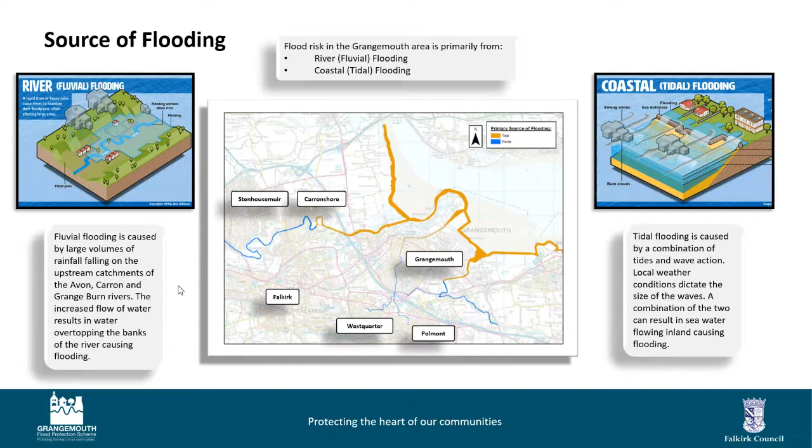Sometimes the feedback we get from communities is a question around why do we need to have any scheme at all. There's maybe a lack of understanding of what the flood risk is at the moment.

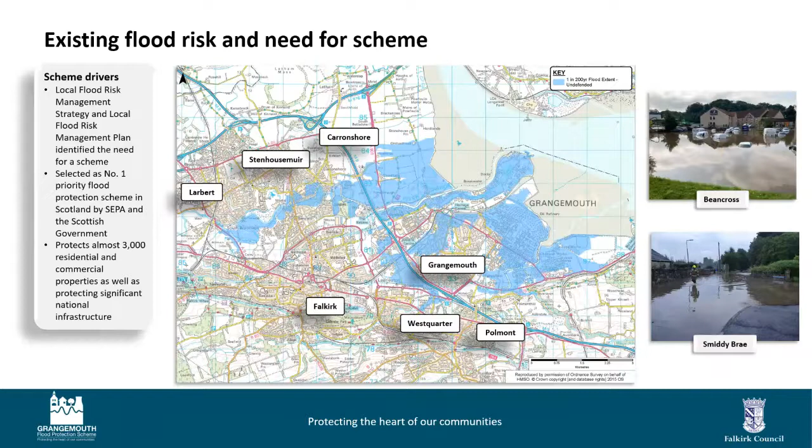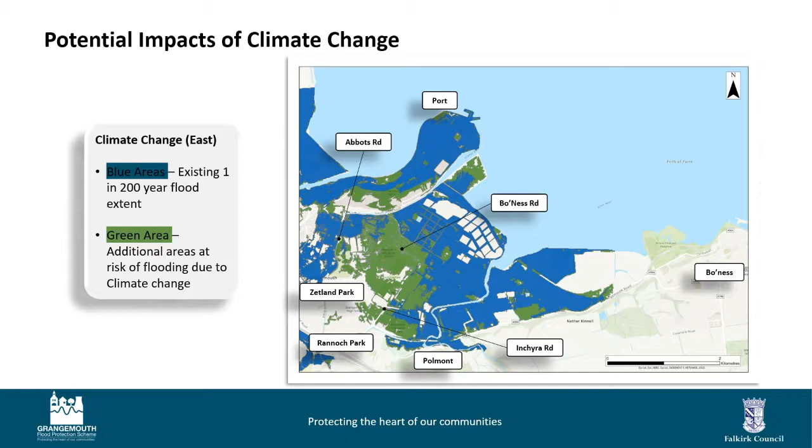In terms of numbers, the number of residential properties at risk at the moment is around 2,500, but with predicted climate change, this rises to around 5,500. A significant change, and this is why we're looking at the proposed scheme and what we can do to provide resilience for the communities.

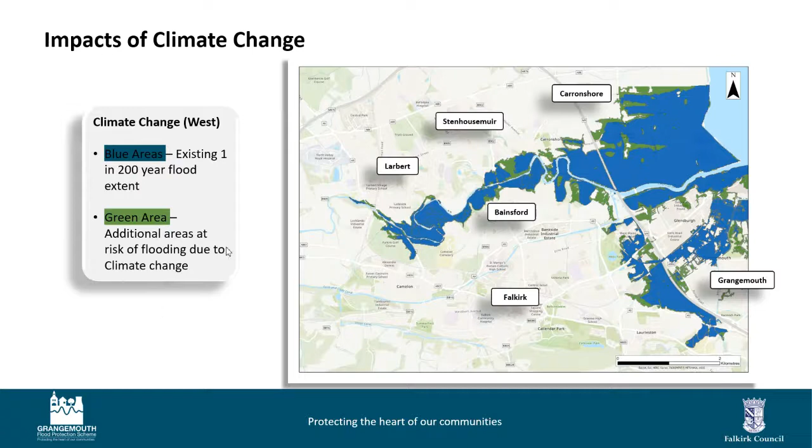As I stated previously, this engagement process, which began a couple of years ago, will continue throughout the design development phase, leading up to formal notification next year. So these next 6 to 9 months are really key to ensure that as many local people as possible are made aware of the project and the proposals, and have an opportunity to provide comment.

Although we are restricted at the moment due to COVID from having face-to-face meetings, future consultation events throughout the rest of this year and into next year will be a range of digital events like this and face-to-face events where we can come into the community and speak to individual people. Today's session is more of an overview of the entire scheme, but we're starting to get into smaller groups focused on individual communities.

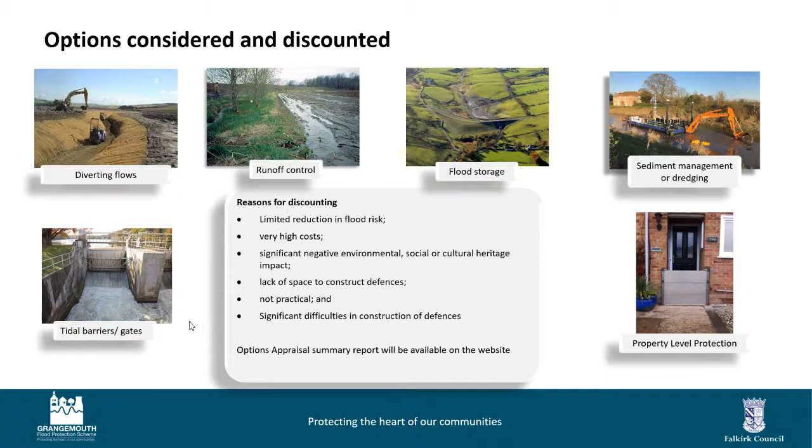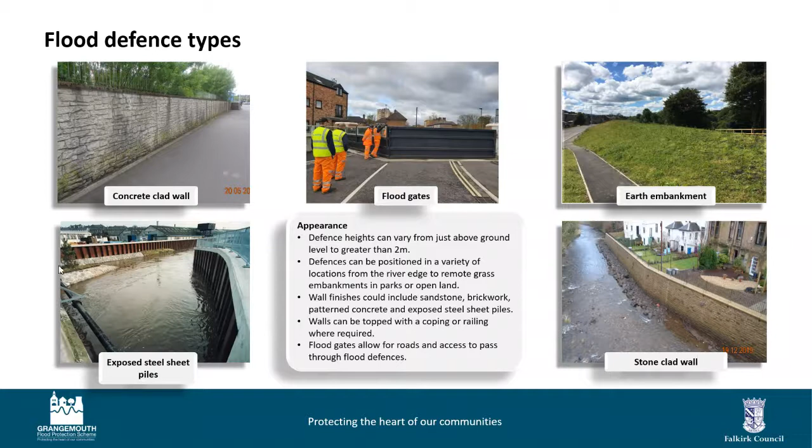So in the next couple of slides we'll talk through the alignment of the Grangemouth flood protection scheme, of the flood defences. We've colour coded where there's a proposed flood wall and where there's a proposed flood embankment, and identified floodgate structures.

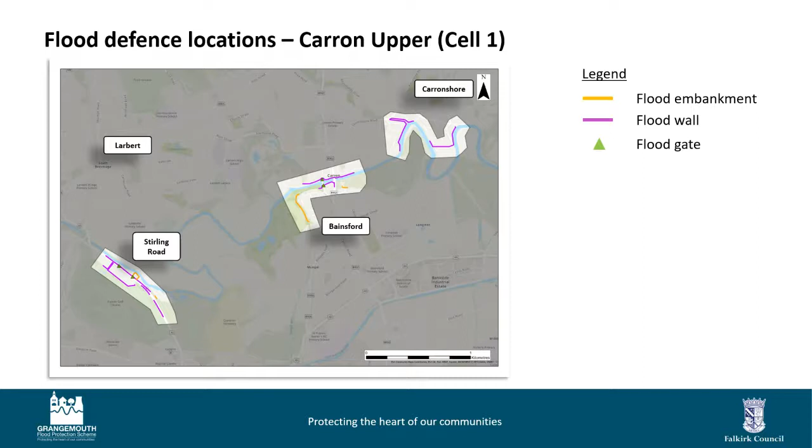We've got flood defences starting at Stirling Road on the River Carron, near the bus depot area. They go along Stirling Road, then down into the Carron and Carronshore area, where we've got a flood embankment around the back of Park Road, then a flood wall on both banks by the Stenhouse Bridge and the New Carron Road Bridge, down to near the Chapel Burn, with a flood wall along the north bank of the River Carron and along bits of the Chapel Burn, then down into Carronshore itself and around by the Dock Street area.

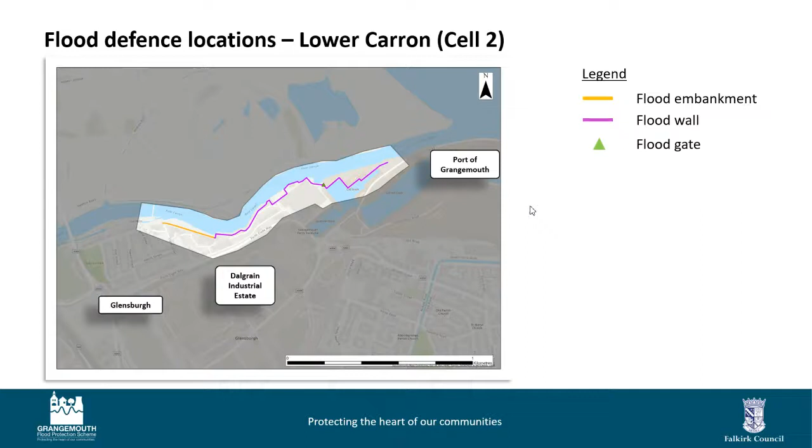So the Lower Carron, which we term as Cell 2, has a flood embankment starting at the canal entrance, where the Charlotte Dundas path is, tying into high ground, continuing along to near the Jarvie plant site. Then we've got a flood wall continuing along the top of the bank, past a number of industrial sites around the Grangemouth Yacht Club, which ties into the flood defences in the port of Grangemouth, coming into Cell 3.

And we have a flood wall parallel to North Shore and South Shore Road, continuously around the port. One thing to note is that we also have a port study ongoing at present, relating to the lock gates at the port itself. We need to change or increase the height of the gates at the entrance to the port, and we're doing a separate study about what options are going to be practical there.

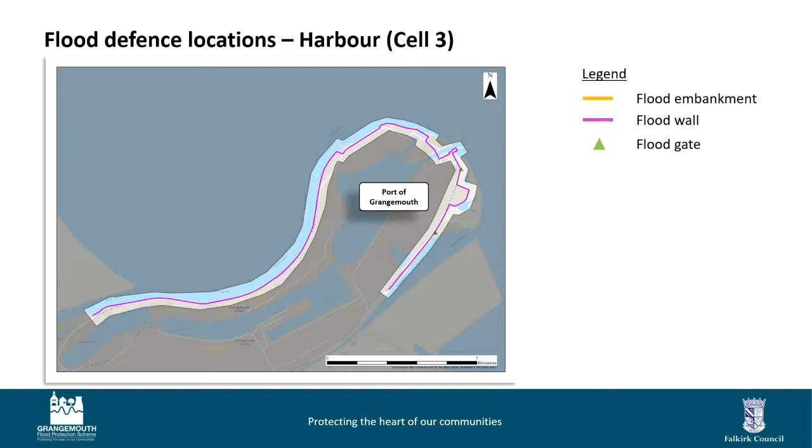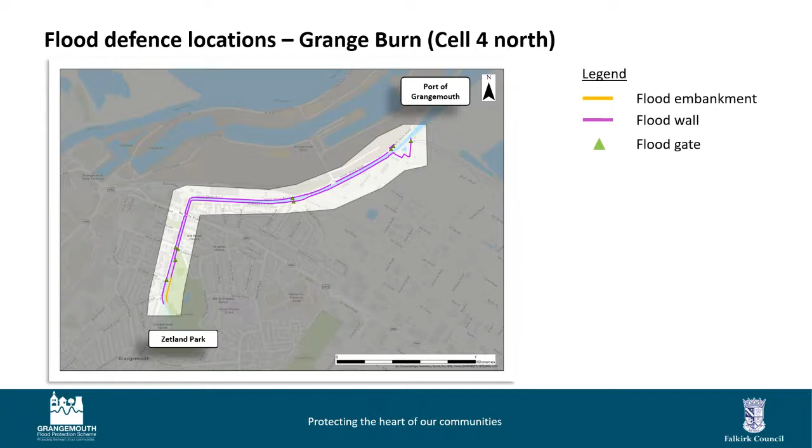This is Cell 4, the southern section. Due to the options I've just outlined for the lower part of Cell 4 in Grangemouth town, we're trying to make better use here of the flood relief channel, and where we've got a blue star on the plan, that's a flow control structure.

The plan is to control the amount of fluvial flows going down the Grangeburn and into Grangemouth town itself by diverting more flow into the flood relief channel and out into the Avon. A consequence of this means we need flood defences, walls and embankments along most of the northern bank and some of the southern bank of the flood relief channel. But we feel that is a good trade-off to reduce the number of structures within the Grangemouth town urban area.

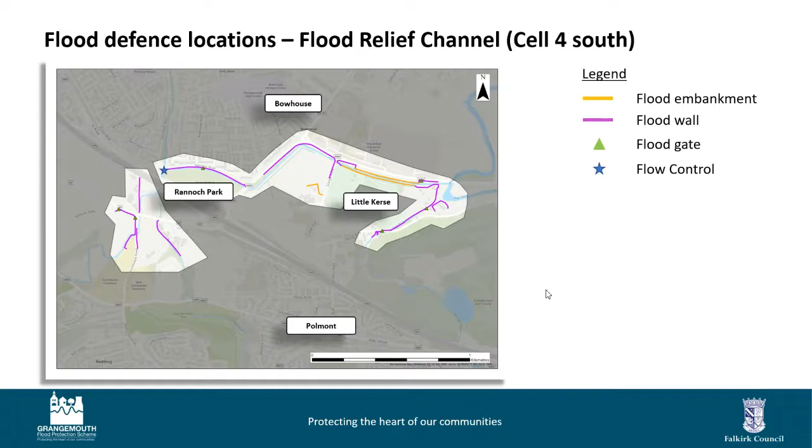There are also flood defences in the Bean Cross and Klondike area, which are to stop the Polmont and the West Quarter burns coming out of bank, and the flood defences along the Millhall burn for Reddock Road and Smithy Brae are there to stop the Millhall burn having to come out of bank and flood properties and land there.

Next slide, please. Cell 5 covers the River Avon, so we've got more or less continuous flood defences down both banks of the River Avon from Hull Flats Road. The defences just to the south of Hull Flats Road are there to stop water having to overtop the road and cause the road to be closed.

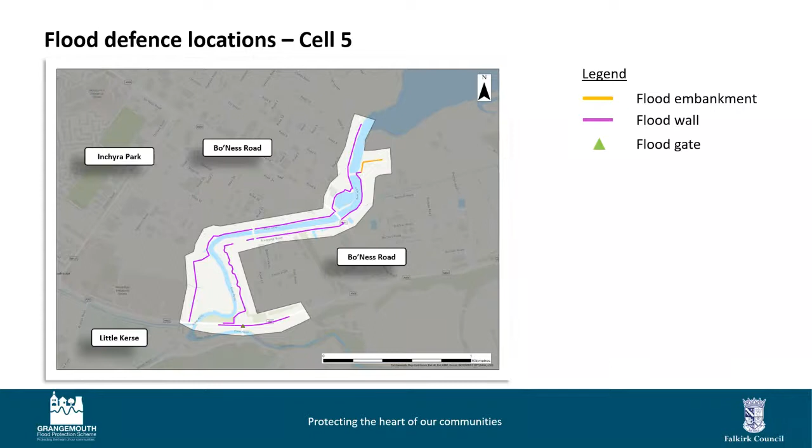And where the defences end at the mouth of the Avon, they will tie into Cell 6, which covers the estuary frontage. So they're continuous from Cell 5 and 6, the flood defences, and again the defences over on the very far northwest by the Grange burn link into the defences in Cell 4.

There's a range of flood embankments here and flood walls. It's probably worth noting that the defences in Cell 6 particularly do encroach into the Firth of Forth special protection area, and I'll come on to that in the next slide now.

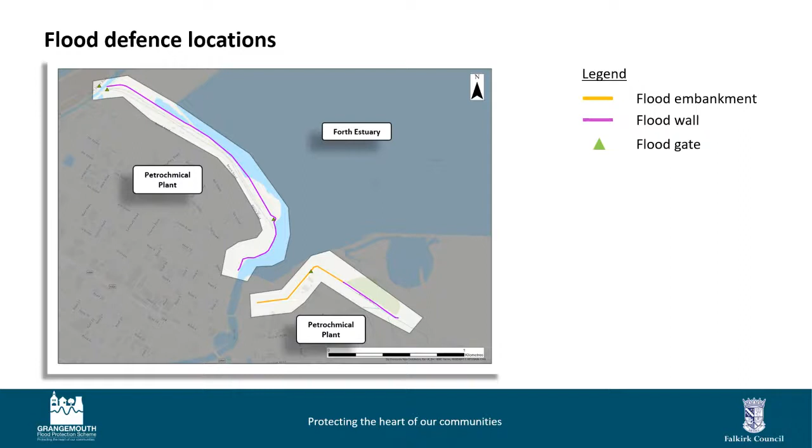The environment is a key consideration when we're developing the flood protection scheme. Over the last 5 or more years, we've undertaken a number of surveys which have identified the presence of wildlife and important vegetation and habitats. This information is being used by the project team to consider the impacts of the proposed scheme during the short, medium and long term, and where possible we are trying to avoid any impacts. An environmental impact assessment is being undertaken, and we are also doing a habitat regulations appraisal due to the encroachment into the Firth of Forth special protection area.

It's probably worth noting here that where it's not possible to avoid an impact, we are having to look at appropriate mitigation for this, and also to restrict certain work areas or how we actually construct the flood defences.

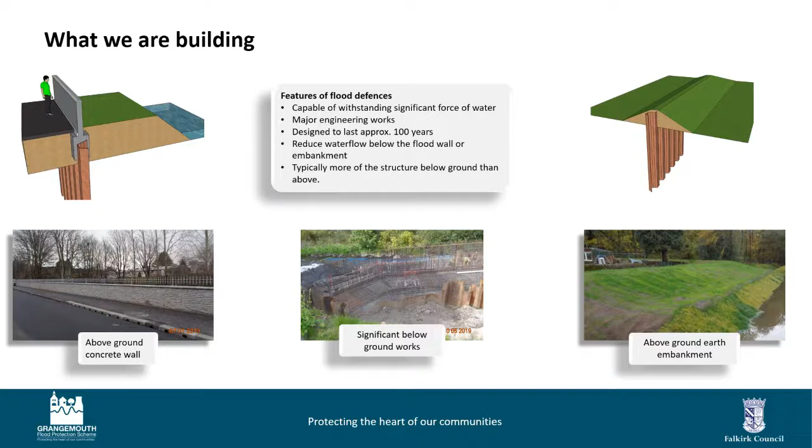Next slide, please. So the pictures here are just examples of flood protection works that have been undertaken in Scotland.

All the construction works will be undertaken by an experienced contractor with a track record of building schemes of this size and type. We won't be undertaking construction over the whole scheme area at once - we'll be working in discrete areas to control and minimise the inconvenience.

There will be a team closely overseeing and monitoring the contractor to ensure compliance with any stipulated constraints or conditions. Health and safety is our primary consideration for the public and the workforce, and we will be engaging and consulting with the public from now onwards, throughout the construction phase as well.

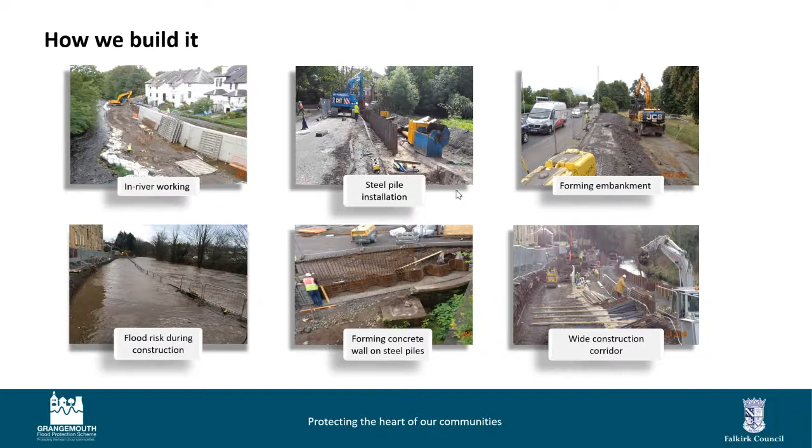They're just some examples really.

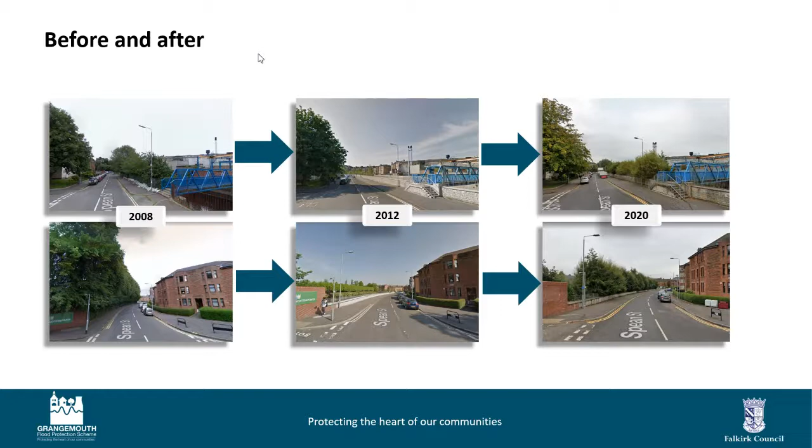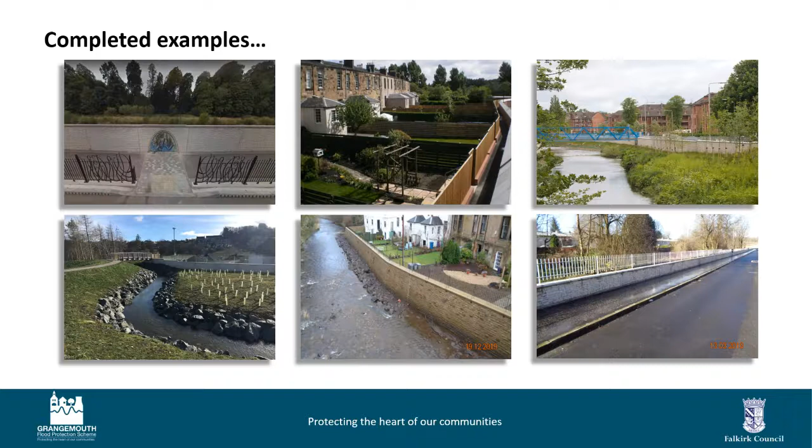And I'll hand you back to Alistair now. Thanks, Richard, thanks for going through those slides for us.

Just wanted to pick up on what we said earlier - this isn't the start of the journey, and certainly not the end of the journey. There's a long way to go yet.

We will be looking to take on some learning from the events in June this year, and to tailor those future events to understand what kind of themes or topics people are more interested in. Not everybody will have the same concerns depending on what area of the scheme they happen to live in or work in.

The impact on communities in Carron Shore could be quite different to what it is in Abbots Road, Grangeburn Road areas, and the industrial areas will be completely different again. So whether it's commercial or residential properties, we'll be speaking to those in different groups and different formats.

Alongside the engagement events, we have a STEM activity programme going into schools as part of the educational curriculum. That will also give school kids an opportunity to come out and do site visits whenever there are construction works to come along and see.